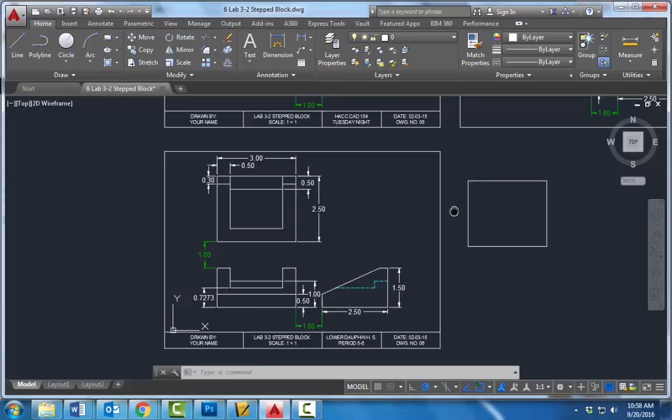Now I need to get this gap here. Well, it's 0.5 down, 0.5 over, and I can assume this side's the same, and 0.5 up from the bottom. So offset 0.5 on all 4 sides.

And then I need to do some trimming. TR, enter, enter. Let's see, I don't need this one or that one. I don't need this one or that one or that one and that one.

Next, I have these short little lines that if you look, they're 0.3 down. So O for offset and enter, 0.3 and enter. Click on the top line and go down 0.3. Trim off in the middle here. TR, enter, enter, trim. That's the top one.

Going to draw a line 1 inch down, get a little spacing. The height of this, I don't know over here how tall this is, but it matches up with the side view. So it's 1.5 down. I'm going to go over the same distance as the top, which is 3, and the same height up, 1.5.

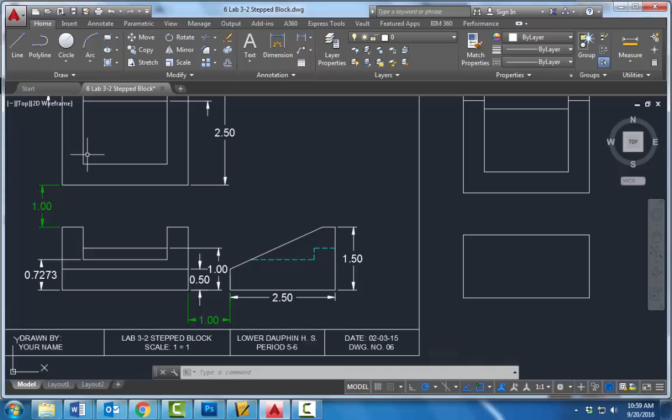I'm going to click over here and close it and delete out that little 1 inch spacer I put in there. Now, these sides here line up with the top, so they're 0.5 over. This line here on the bottom is 0.5 up from the bottom. So again, offset 0.5 on the sides, on the bottom.

This line here is 1 inch up from the bottom, so offset 1 inch. And this line here, it's kind of this random number, 0.7273. So offset 0.7273, hit enter, offset that line up.

Now the tricky part is trimming. TR, enter, enter. This line in between is trimmed. This line right here is trimmed off on the sides. This line, the second one, that's trimmed off on the sides. And this one's trimmed off at the bottom and right there. And it takes this, that's the hard part, is knowing what to trim, what to keep, and making sure you don't miss anything.

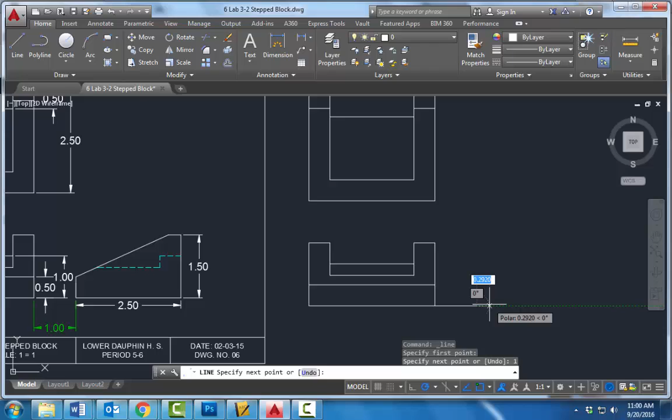Now we can do the side view. We draw a line over 1 inch. I'm going to go over the rest of the width, 2.5 and enter. I'm going to go up 1.5 and enter. Delete my little spacer. Now, I need to know how far over this line is, but I don't.

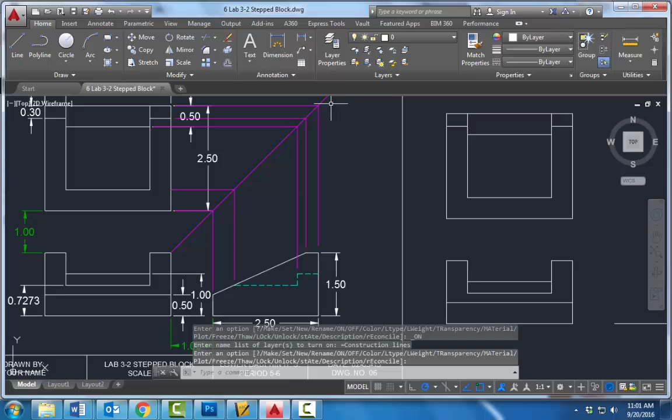There's this cool little method called the 45 degree, where if I draw a line 45 degrees, and then I draw, okay, here's my 0.3, and I hit that corner and go down, well, guess how long this is? 0.3.

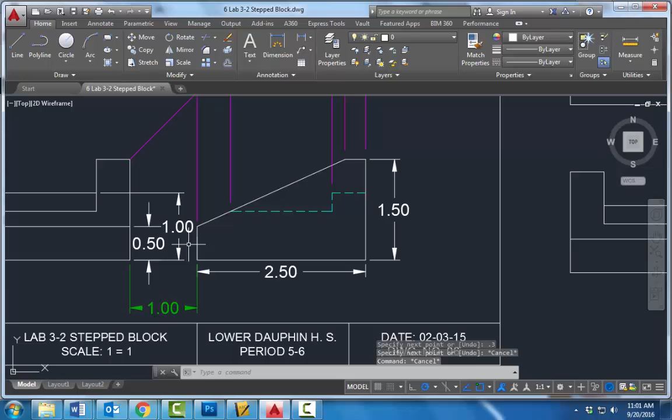So, draw a line over 0.3. This line right here, I get the height from the front view. It lines up with this line, which we know is 0.5 off the bottom. So, line 0.5 up. And then just connect the dots.

Okay, now I need to do the hidden lines. So go to the by layer drop down, other, click the load button. I would use that middle one, hidden 2, the small one. This is 0.5. Hit OK, hit OK.

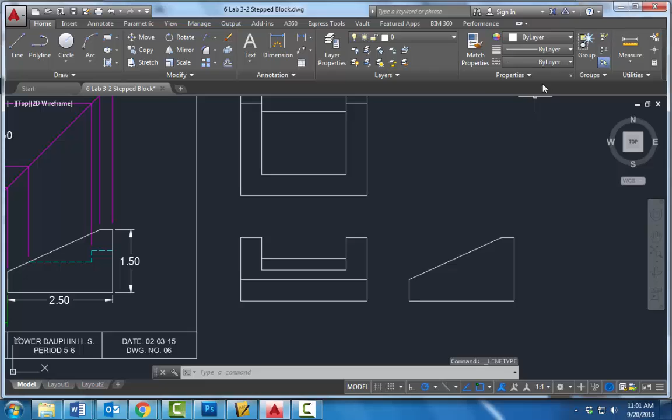Activate it. Draw your lines. Now, people in the last class, you got to draw them from these top 2 here. Sometimes some people drew them from this one, and that's not right.

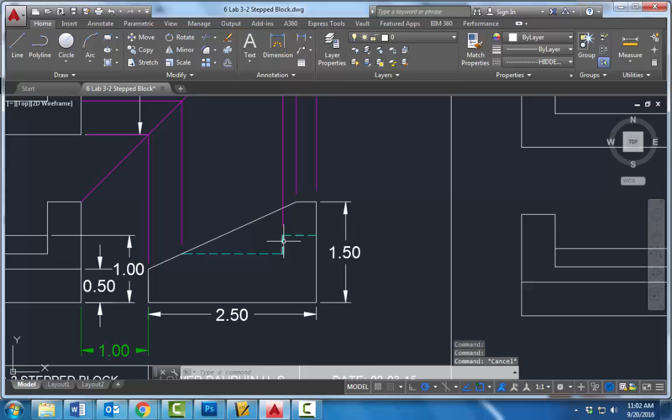All right, that gives us this one and this one, but now we need to know how far over this vertical one is here. Well, again, if this is 0.3, take a wild guess what this one is. 0.5, and I can know that because if I follow these two lines up, and then they bank, what's the difference between these two lines? 0.5. So, offset, 0.5.

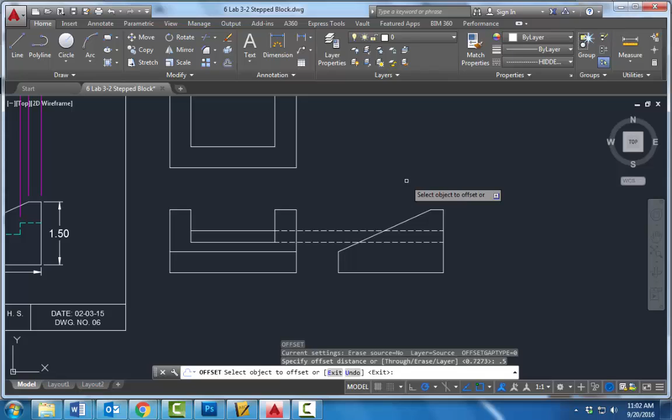Now, that's not the right type of line, but watch this. If I click on it and change it to the hidden line, it will change. So you can select any object or any line and change its style to whatever you want.

And then you just got to trim. TR, enter, enter. Trim the top, trim there, trim there, trim there, there, there. And I'm just going to select these two parts and delete them out.

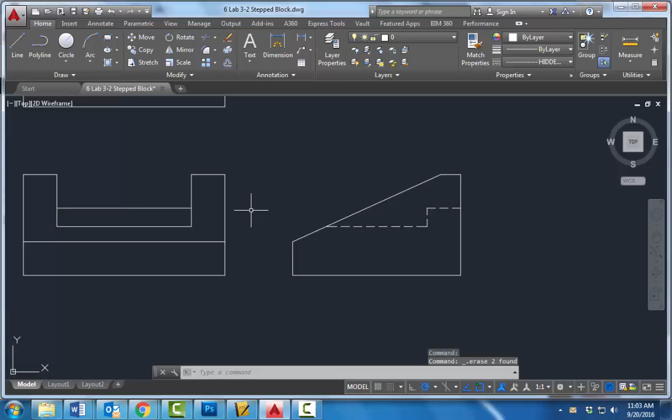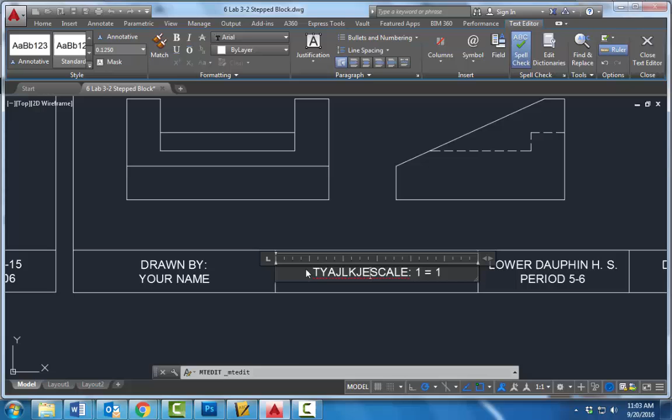Okay? Then you're going to highlight, find your title block that you have. You should have it saved on some file somewhere. Copy, Control C to copy, Control V to paste. Put it in there. Don't forget to double click on the title. All caps. Type in the name. That's obviously not the name. Print it 1-to-1. Okay?